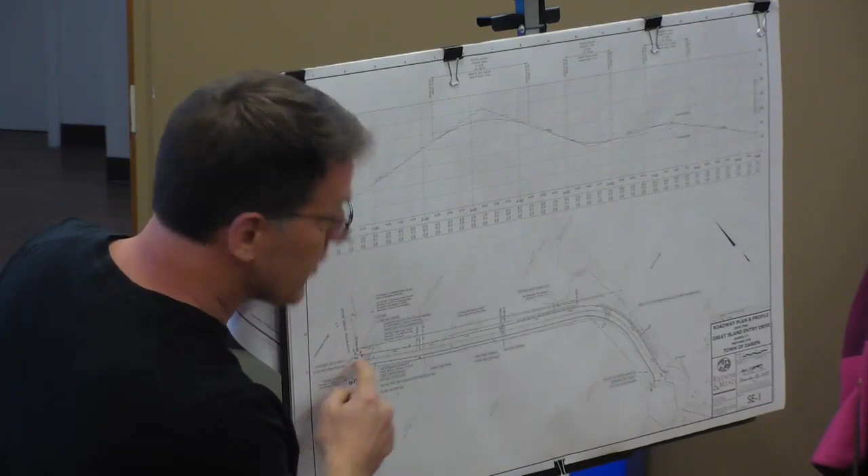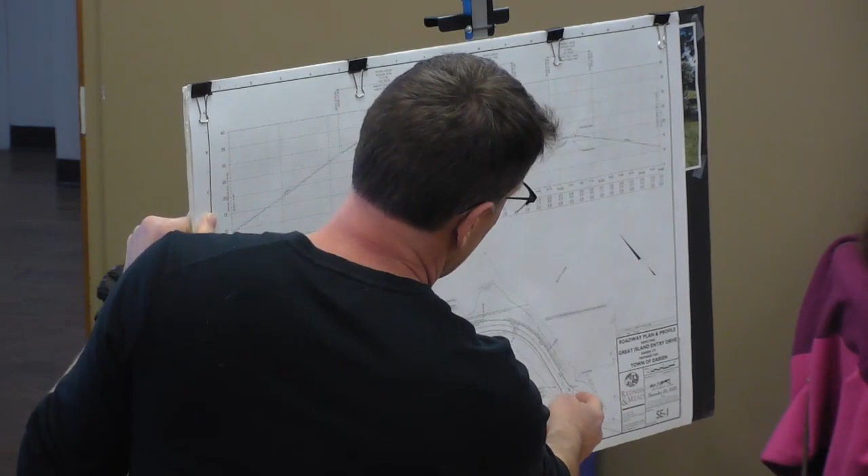You hear Great Island and you think that whole big, beautiful property that the town bought, which is what Great Island is. But what we are here to talk about specifically tonight is not the island proper, but the driveway to the island. It's a piece of property that starts just across Rings End Bridge, where everybody is familiar seeing the gates from Rings End Bridge. That piece of property goes in about 1,000 feet to what was the cul-de-sac of Great Island Road, which was part of a 1980s subdivision of this parcel of land. But now that piece additionally is owned by the town of Darien. So we are here tonight only talking about this 1.6 acre piece. And the importance of that 1.6 acre piece is that it's really the critical path to open up public access to the island.

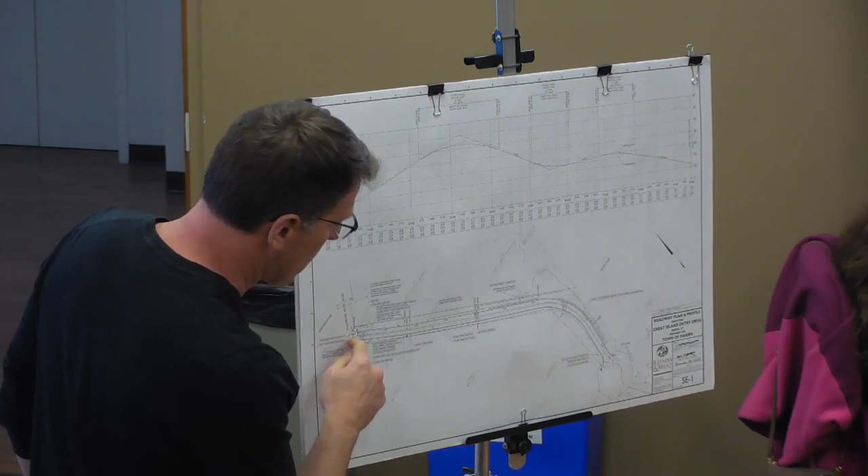Right now in this narrow strip of land is a 12-foot wide driveway. Obviously a 12-foot wide driveway is not wide enough or comfortable for public access. We also have to think about pedestrians and strollers and bikes, because ultimately we have a wonderful open space at the end of this road to use once we can get there. So in order to make this suitable for public access, which is the focus of this first bit of work proposed, we're going to replace the driveway that's there today with a new, wider driveway. We will be placing a 22-foot wide driveway, as narrow as I would want to make it, but still comfortable for two-way vehicular traffic between approximately Rings End Bridge and here.

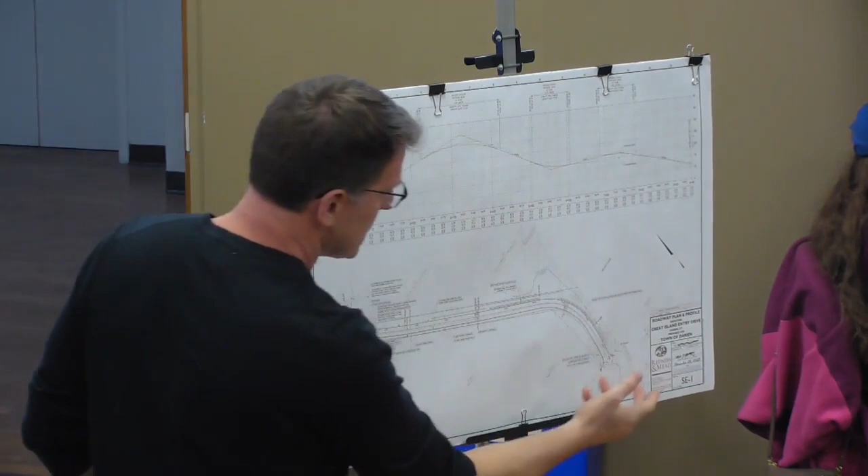These are the two causeways, if you've visited Great Island, that go out to the island proper. So this gets us to basically the entry point, the other entry point to the island. In addition to the 22-foot driveway, we're proposing a 5-foot sidewalk set off the edge of the road by a couple of feet, to be a little more gracious and keep the pedestrians and vehicles a bit separate.

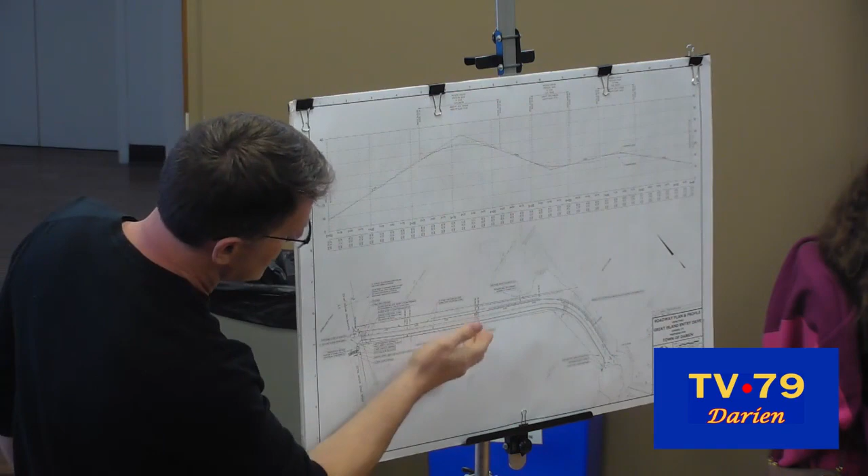Given the position of the existing drive, there are actually portions of that existing 12-foot drive that are on this property to the west, north being that way. So the driveway is not only being widened, but it's actually being moved and widened, so it's an all-new driveway. And because it's being moved and widened, there are some spruce trees on the east side of the access way that are in the way of the road, so they're proposed to be removed.

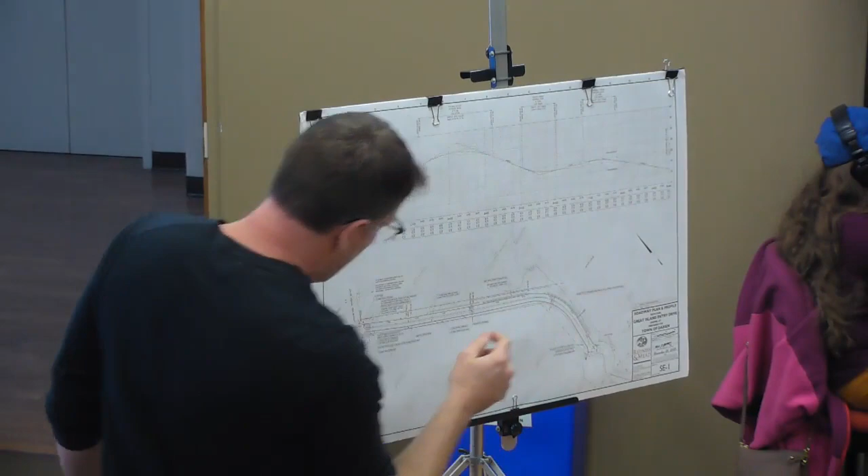At the beginning, at the gate. Your plan is so much prettier.

The existing gate is, of course, too narrow again for that 22-foot driveway and that 5-foot walk, so we are proposing to reconfigure that gate.

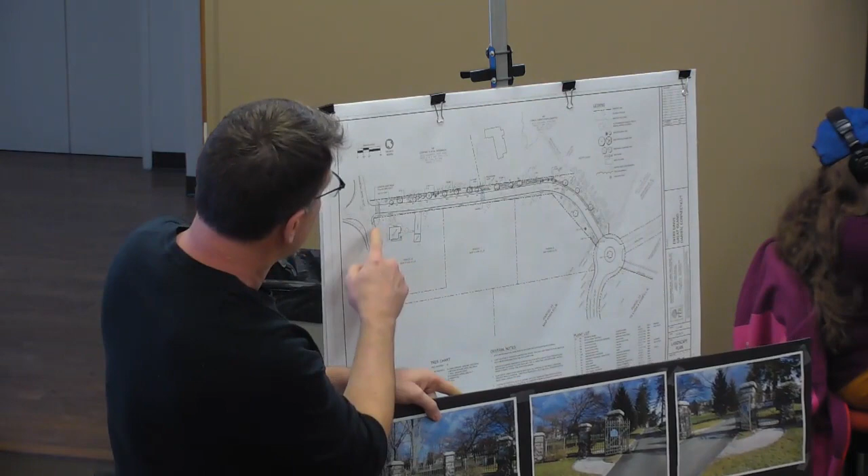The right side will stay just the way it is today, but for maybe one change here. Because you see the property boundary here, this is what the town owns, this is owned privately, so we actually can't really touch anything right of that post. The town owns the post, someone else owns the rest.

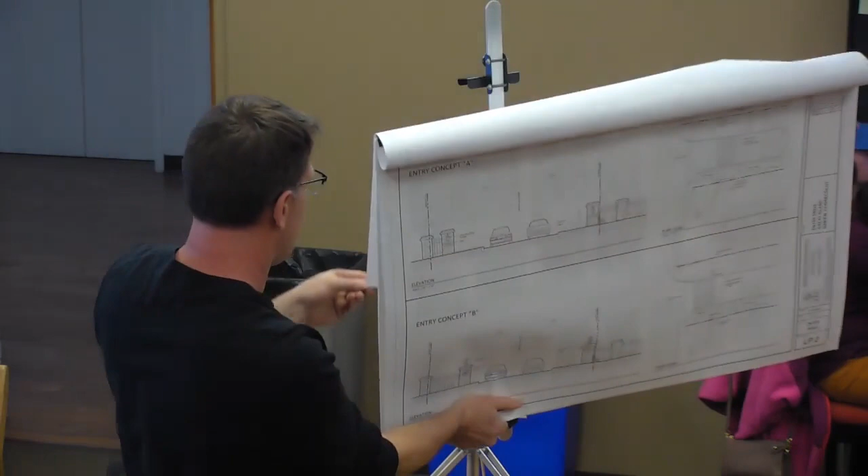So we're proposing to leave that pillar right where it is, but we're going to reconfigure the left side of the driveway. Matt has prepared two options for that, just to study them, although we've kind of come up with a favorite after talking with the design team and the Great Island Advisory Committee. There's option A at the top of this sheet and option B at the bottom, and the differences largely are over here.

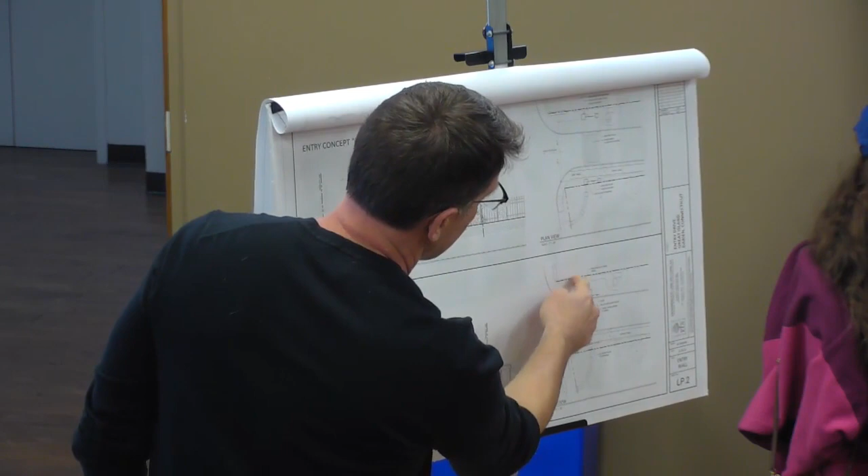Again, that doesn't move, that's the right side pillar. This would be the rebuilt, relocated left side pillar, tight to the curb line but not symmetrical on the road, with an arcing wrought iron fence to connect to another pillar that's staying. This option tries to preserve the gates, though I'm not even sure we can swing them open in that direction because the slope of the land goes up. Even if it preserves the gates, they'd have no purpose because they wouldn't close anything if swung closed.

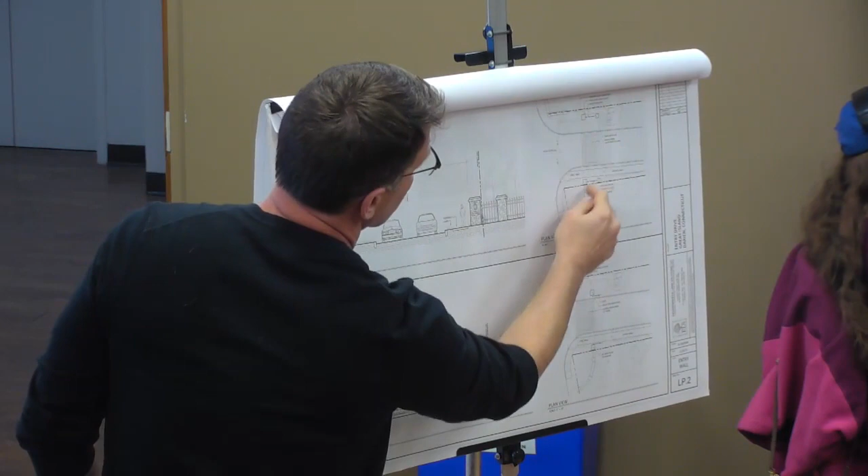So conceptually, we came up with this version. Matt came up with this version where you have the main larger pillar here on the right side, which is not changing, a reconstructed pillar here, and now this is centered on the driveway, so it feels symmetrical as you're driving in. Then the two minor pillars are positioned to the back with a piece of wrought iron fence connecting the two. So those are the two options for the entry, although we like this one, but of course we're open-minded to design comment, which is why we're here.

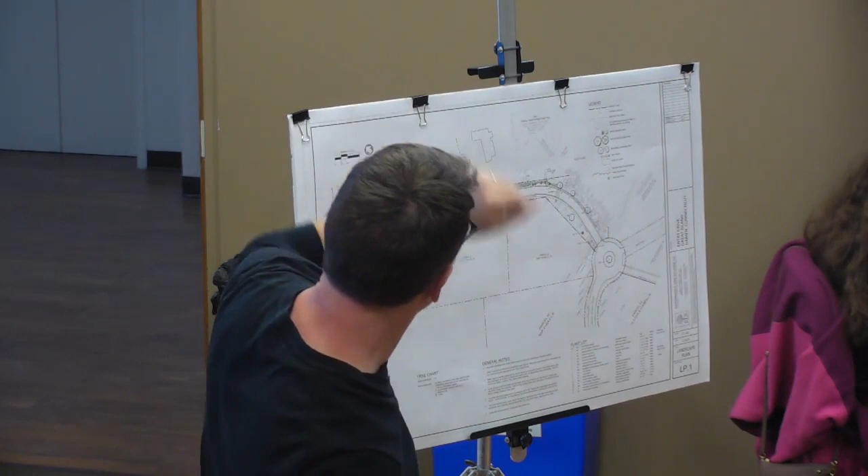Just going back, big picture again. Because we're pushing the driveway to the east, we're getting into some topography where here the land slopes up, here it slopes down, here it slopes down again, and to avoid a big fill slope that could impact properties we don't own, we're proposing retaining walls to make up the grade at the edge of the road.

So these two walls, the face of the wall is actually on the opposite side of the road, so these are fill walls, and this is lower and this is higher. So the main face of the wall is here and here.

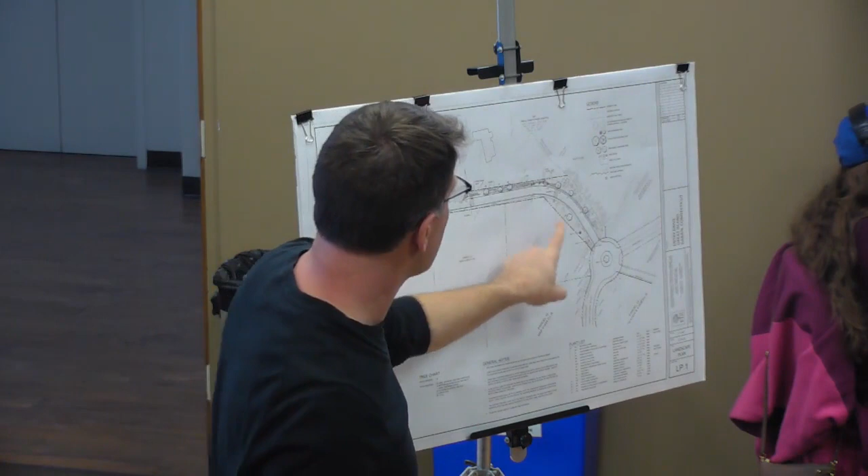And on this side, we are presenting two options, really for budgeting so we can price them both ways. The first, primary option, if the budgeting works out, is we'll just have a 2-foot tall parapet facing the roadside, and that 2-foot tall stone masonry wall parapet will function as the guide rail needed to protect vehicles from the lower elevation.

The second option that we're pricing is the wall would end at grade and be flush with grade, so you wouldn't even see it from the drive side, and instead there would be a wooden guide rail in front of the wall to protect the vehicles there.

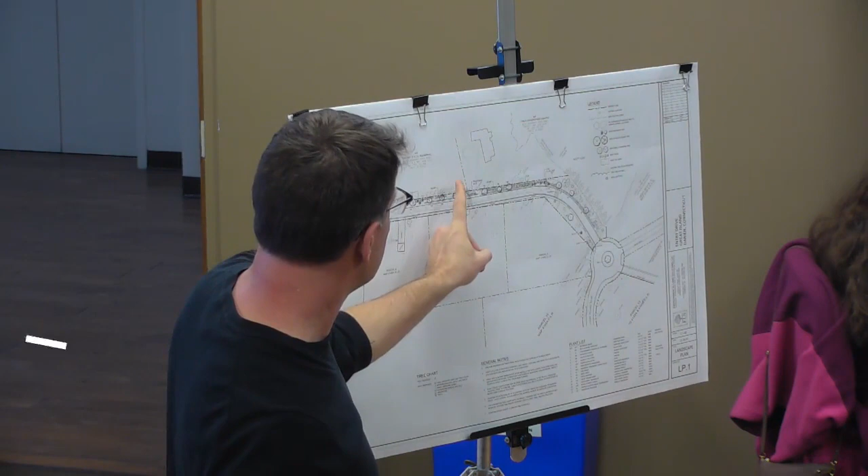Here, this is a cut wall, so it's low on this side, high on this side, so you will see the face of the wall here from the driveway. For these visible sections of wall, we're trying to respect what we saw on the island in terms of the design of the wall.

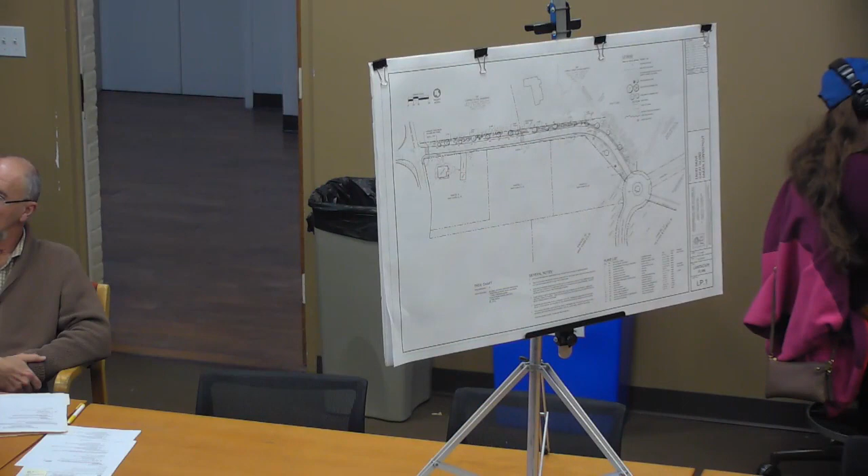So we talked about the entrance, the walls, the walkway. One thing that comes up is the existing 12-foot wide driveway, which you can see here, here, and here, has on its edge a gutter, with blocks on either side and a cobble-ish gutter in between. We're not proposing to recreate that detail on the new drive.

It's simply not anything we'd recommend for what is now going to be public access, in terms of tripping hazard, walking, bike and stroller friendliness, or maintenance. But what we are doing is reusing the curbs—we'll salvage the block curbs, and those will become the curbs of the new driveway. The cobbles will also be salvaged and stored on the island, with the hope that there's some use for them in the future as master planning on the island occurs.

This is kind of the end right now—this is that Great Island Road cul-de-sac, that's the middle of it. Again, not really the focus of the application, it's just presented as what's there. But we imagine that may be included in future planning for the island.

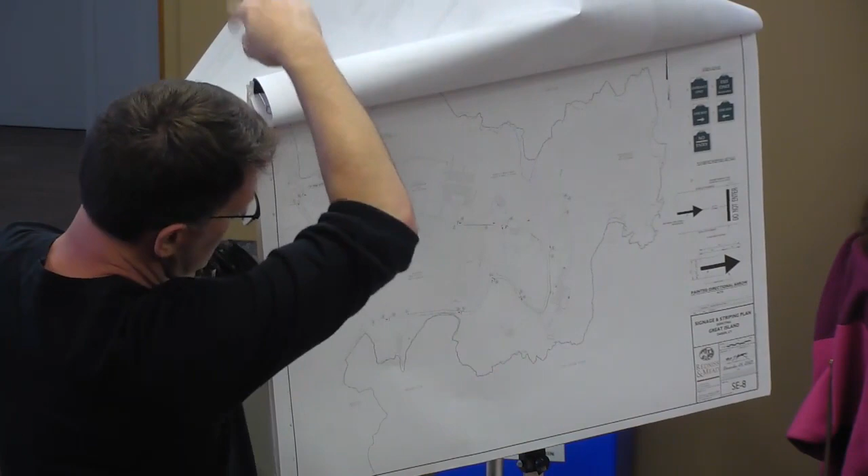this is the roadway network on the island. These roads also are not 22 feet wide, so they're not suitable for two-way traffic. So in the near term, the proposal is to create a one-way loop on the island, with some wayfinding signage added to allow for that loop. Again, while the bigger picture planning process is occurring, we can get public access in a safe manner. The only MUTCD traffic signs would be the stop sign here and the stop sign at the end of the new driveway. Otherwise, we're talking about using a custom sign that recognizes the parkland context for the wayfinding.

So I'll have Matt talk through it. Craig, just to clarify—you'd call this phase one of the Great Island project? Almost phase zero, right—like the thing that's necessary before we do anything else. And just to make sure the scope is clear, this is just talking about getting the driveway in, right? That's right, we're not getting into any other details, you're not proposing or entertaining anything else right now, it's just the driveway. That's right.

Can I ask two questions about the driveway before we go on? Yeah. I know you said the gate wouldn't be able to be used, but in the future for privacy and security, is there going to be a gate for nighttime traffic? And it seems to me that getting to that road, if you're doing all that work, there needs to be some thought about lighting—have you thought about it? Yeah. And the other thing I didn't hear anything about was a bike path. To me a walkway and a bike path are two separate entities, that's huge. Matt's going to talk about lighting and landscaping.

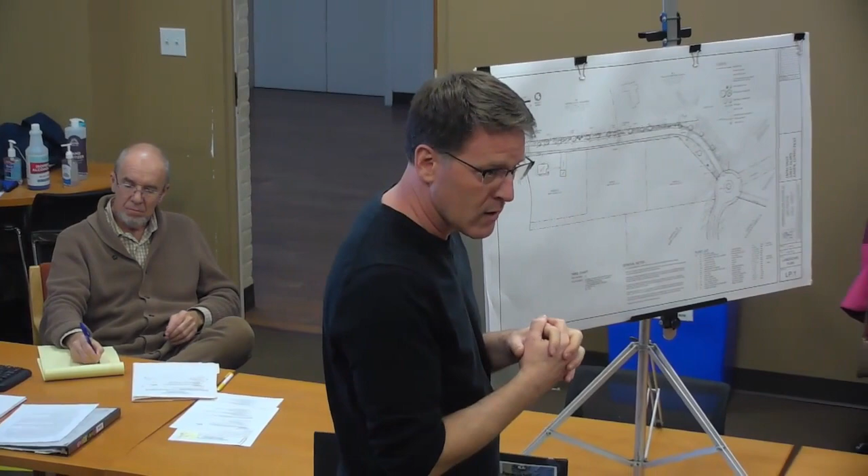Yeah, I appreciate that. Given the narrowness of this particular strip of land, we'd assume biking is very similar to what it is coming here, which is you're going to be on the road. The hope is that something more grand is developed on the island if you wanted something segregated. But I guess my question is, does it have to be that way?

Because to me, the entrance is actually the key portion of this, because that's where the most vehicle traffic will be, especially in the near future if that's the two-way section of this whole project. We don't know if it'll be the only two-way section eventually, but for the time being, whether it's 1 year or 5 years, there's gonna be a lot more interest in this piece of property right now versus later. So to not have a dedicated bike path if you're actually physically building this, I totally understand the comment, can't refute it.

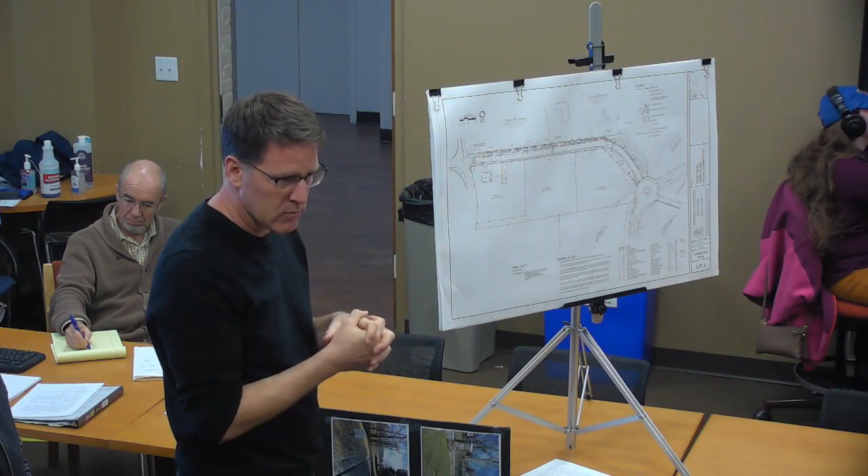We just have to ask, is there room? Is there limited space? This is the property boundary here. The sidewalk is basically immediately adjacent to that. This is the roadway here. And then we have to respect the neighbors in terms of screening. We've met with all three neighbors to talk through the plans and design them in a way that's sensitive to everybody.

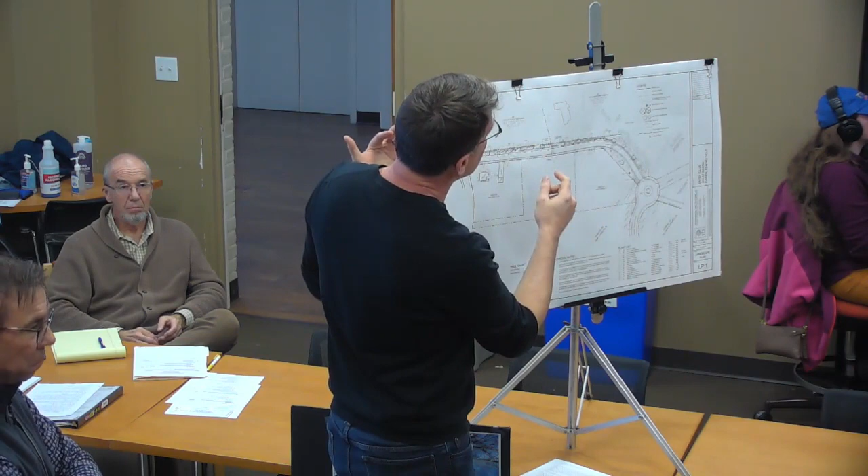I guess you could take the remaining land between this curb and the walls and make that a stable surface, but it increases the amount of impervious surface, and we haven't accounted for that.

Is there an opportunity to maybe consider designating on the roadway a bike route? Like I've seen in Hoboken and the city there, where there's signage for the edges of roads that cue the driver to say you're sharing this space. That way people sort of slow down when they're driving.

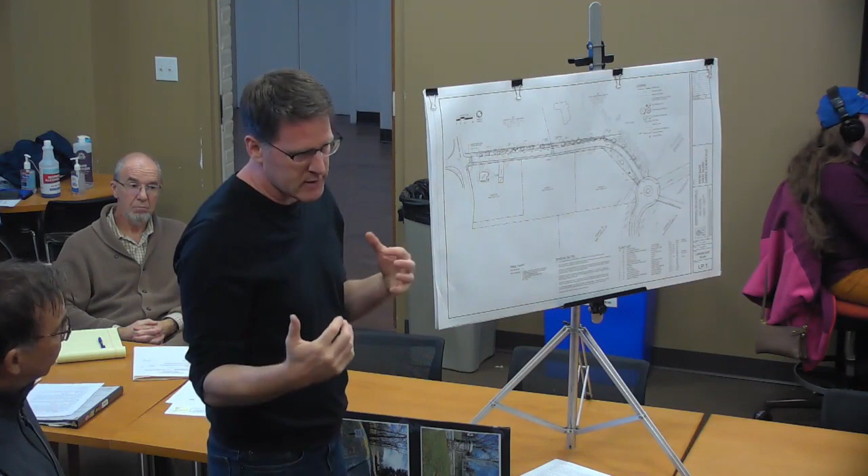He can talk to that a little bit. There's a couple of design features we used for traffic calming. Oh, okay, great, so maybe that's a good segue. But in terms of the gate, in the future these three properties are permitted access to this driveway, so we can't put a gate here. So any kind of restriction would be put here.

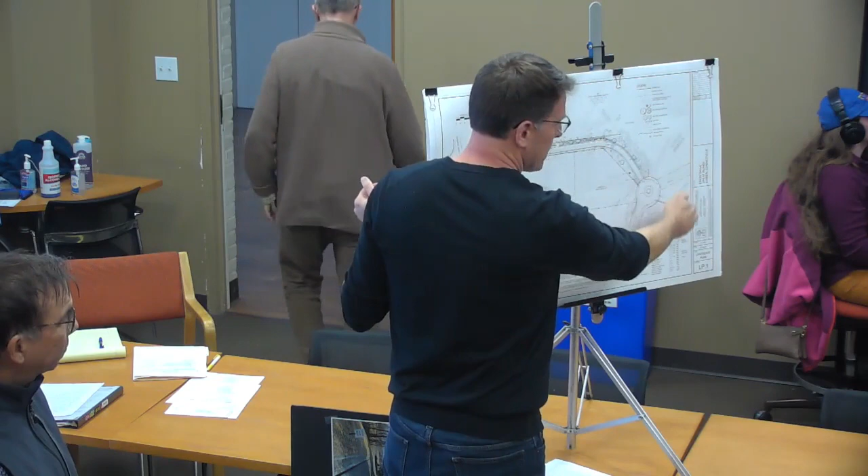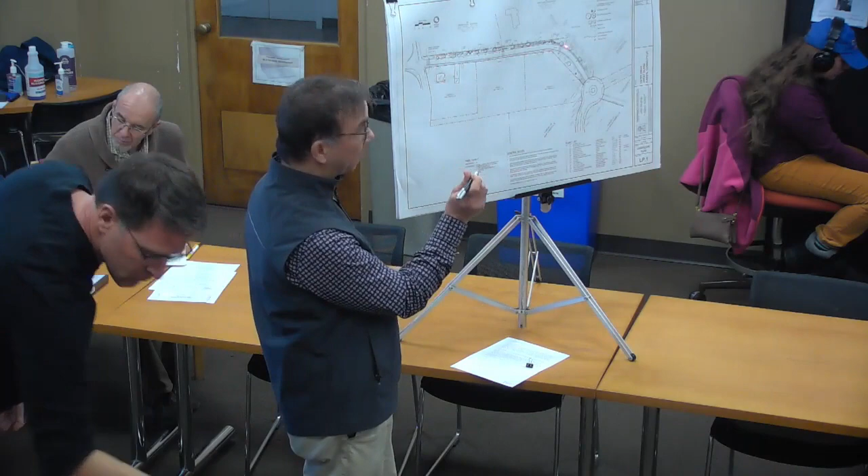Good evening, maybe I'll start with the bike path. I wouldn't want to make the 22-foot road 5 feet wider to get 27 feet. To me, cars would be speeding up and down this road pretty quick, and that takes away from the park-like setting. Maybe I just wanted to start with that one photo.

Just to emphasize what Craig already said, on this one the property line is right at the back of this main pillar. From here over, this is all off the site, so this walkway is off the site, and this pillar actually stays. The sidewalk ends up coming on this side and comes along there and around. Sidewalk is concrete until the pillar, and then it's asphalt beyond that. So the road gets shifted, pushed over to the left, about 7 feet or so from the pillar. So on the landscape plan we tried to match that 7-foot distance.

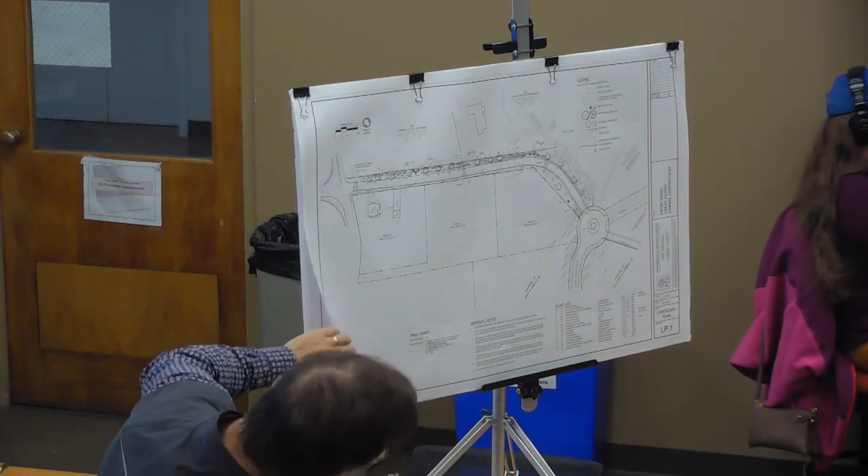Here's the main pillar, here's the property line right through here, sidewalk here, so there's about a 7 or 8 foot distance. Then we had the road, so I wanted this other main pillar to be equally distanced from the center of the road. So it's back about 7 or 8 feet here, and then we have it set back.

The other alternative was just to have this pillar put right up against the road edge, like here, and it's kind of off-centered when you look down. I think when you view down, I prefer this alternative over the bottom alternative. All of the ivy on the walls gets taken off.

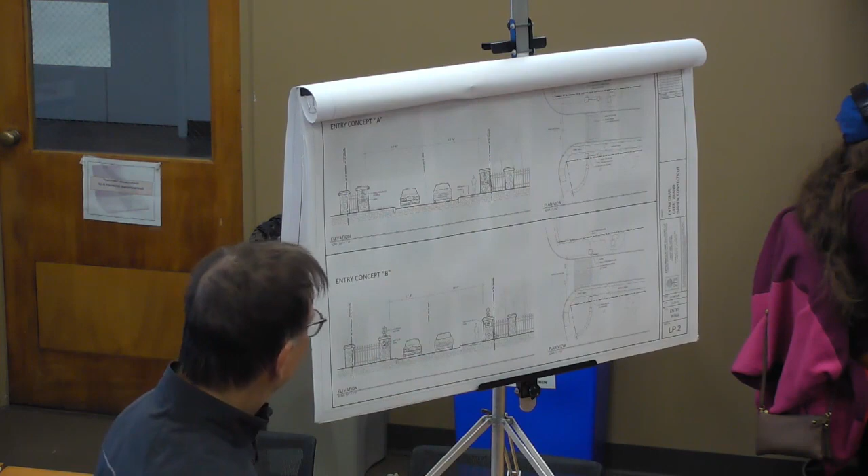So there are 8 pillars on the property right now. Where are the other 4? They're small pillars. There it is - how many pillars? There's 4 on the right and 4 on the left. So some of them straddle the property line.

Well, the reason I'm asking this is it feels wide. So I'll give you a little background - I grew up in suburban Detroit, Michigan. You want a wide road, that's where you go. And I was there recently, and it looks worse every time I go back.

Whenever I see something that doesn't have a New England kind of slightly more intimate feel... what makes Great Island feel so special is it almost feels like you shouldn't be going down that road. It feels like you're going back in time, and you see these details that belong to a past era, or something with Calvert Vaux, Downing and Olmsted - the greats of that era, when Great Island was first made great.

So I like concept B because it closes it down a little bit, but I'd also like to disentangle for the whole island - decouple the pedestrian experience from the car experience. I really don't like being right on the road, it always feels a little odd.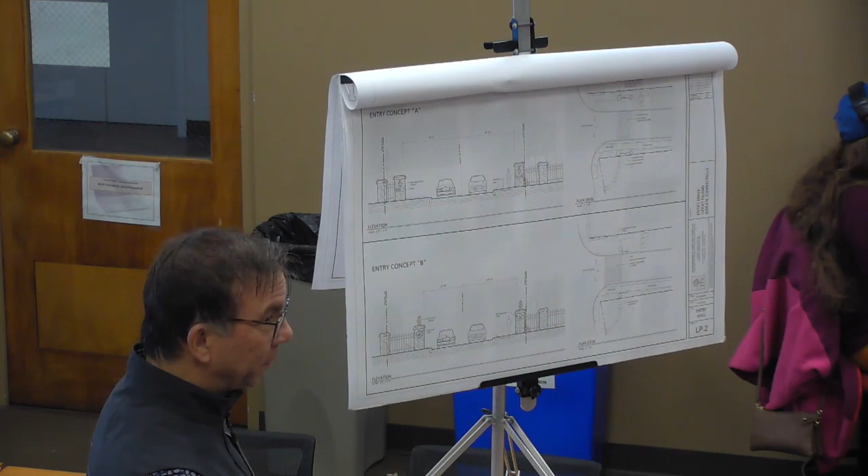We did move the sidewalk. There's an 18-inch to 2-foot landscape strip that's going to run along, just so it's not right up against it.

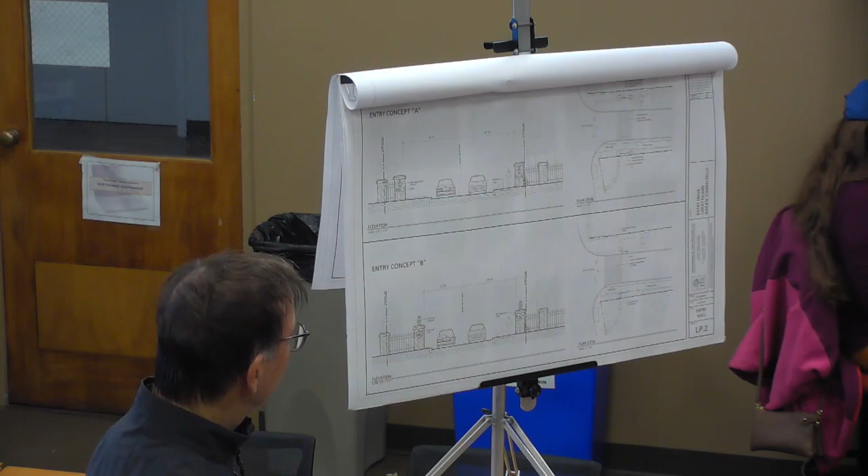Ideally, this column would be right up against the road here, like this one, and that would definitely slow down traffic. But the gate to the right of the existing column - is that going to remain and we just close it, or is that just for the gatehouse access?

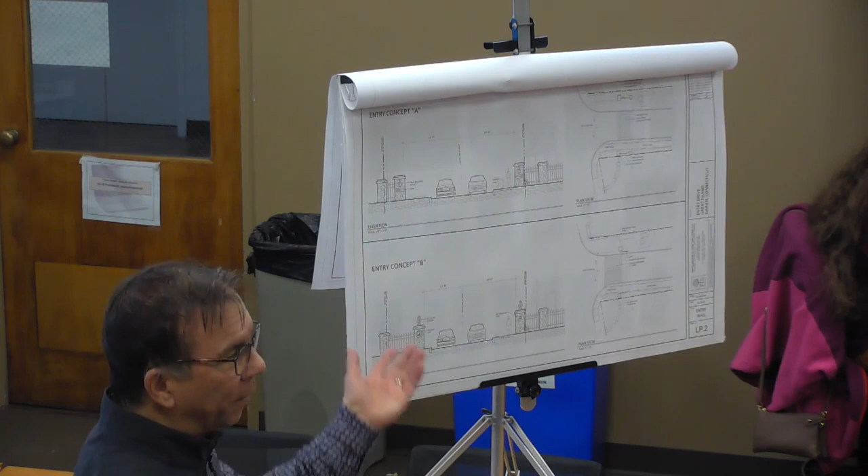So these gates, right here and here - that one on the right, yeah. We just kind of spun them around on this alternative. We recycled the pillars we're removing to put them in the back as secondary pillars, and the gate would go between them, to reuse them since it'd be a shame not to use them somewhere. If they weren't used on the entryway, maybe they get used elsewhere on the island. But we tried to use that.

And then we tried to have some type of paver, I'm not sure what it would be, to let you know that you're entering and give a sense of entry. That would align with the main pillar in the front and the secondary pillar in the back, right here.

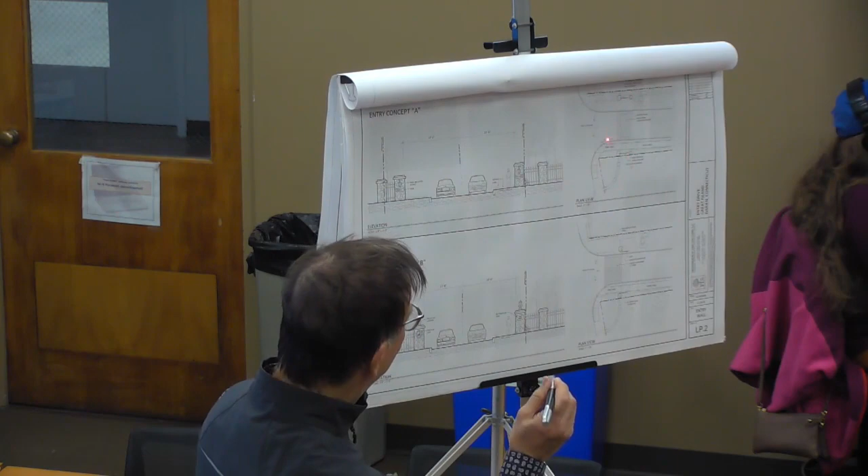I actually have a quick question, not to interrupt - no, go ahead. It's top of mind, I have 3 kids and a very short memory, so not to throw something back... it's something I don't want to take Dan's thunder, because this was his brilliant idea.

The gutters are quite beautiful, I've never seen anything really like that before. I'm assuming all the roads have been widened over time, and it's an interesting detail. I recognize there's complications with having it. Have you looked into maybe keeping one of the gutters as the center lane of the road, and keeping the left gutter in the center to separate both portions of traffic, one going one way, one the other, but having that detail in the center - not to give you more engineering work?

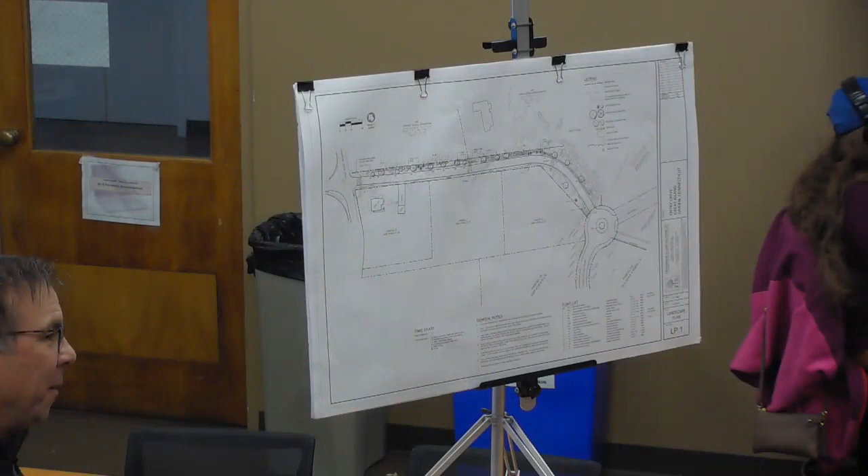We did not. The one thing I'm concerned about with the gutter, if you put them in, is that in 20 years you have to repave or something and it's gone - it gets paved over for whatever reason.

The gutter would go where they're at—we just have to widen the road. So instead of what might otherwise be a double yellow line, keep a flush row of cobbles to demarcate it.

So if we have that pillar and put the small pillar in, do we have to shift over? I think we could move the walk down a bit at that location. I think we'd have room for the small pillar between the walk and the curb.

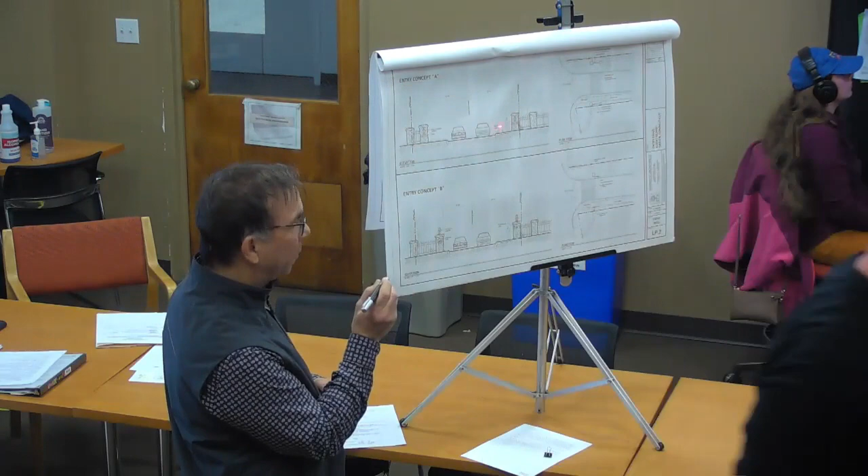So we're just talking about keeping the main pillar here, keeping the walk here, maybe putting the secondary pillar—might have to get shifted like a foot or two over. That's exactly what we were about to communicate.

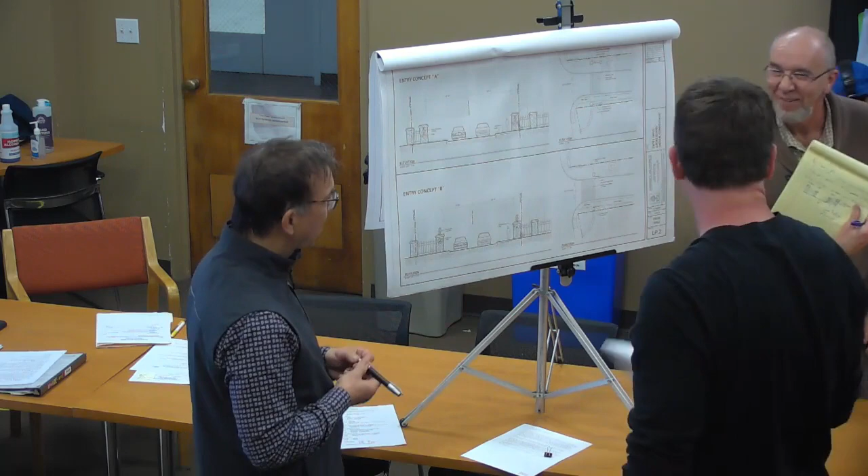That's so funny, that's really nice. See, I told you he's very creative and artistic in his nature. Oh, you got it too? Your minds think alike.

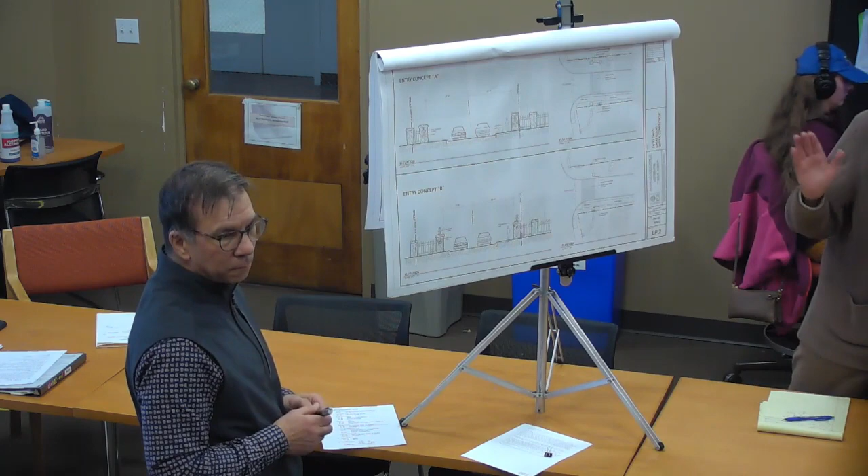That would restore symmetry happening in 3 spots independently—that would bring the symmetry and intimacy to the entrance, where you see the pattern right between the columns. And if you had a gate between the big pillar and the smaller pillar using cobblestones, you could close that gate at sunset, or close it for pedestrians, using some kind of different material.

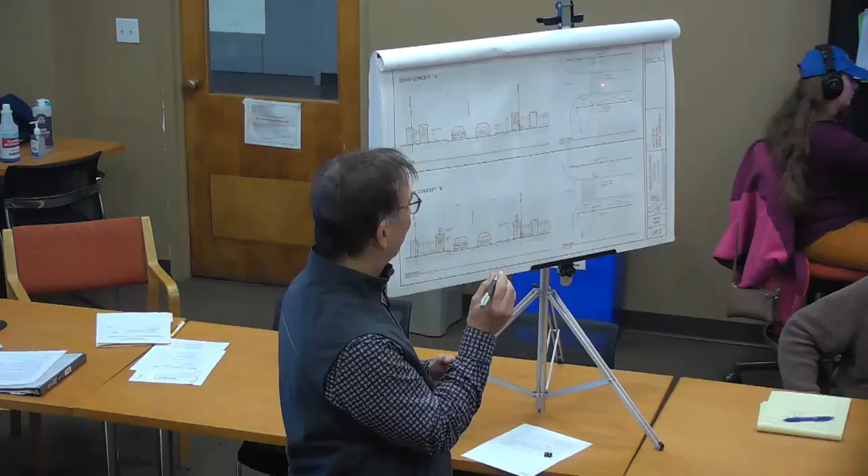No, between the lines, between where the 2 columns are, kind of framing that piece of road to also have that cobblestone, just like a nice detail to an entryway. Plus it would make noise as you cross it—it's a traffic calming element, both visual and textural.

I noticed you had another one further up, is that correct? So yeah, it also would slow traffic again—if you had 2 of those, I thought maybe halfway down the straightaway there's another kind of paver area.

Near the high point, then have to turn—there's another area that coincides with where there's gonna be a light fixture. Correct, and yes, so there's 4 light fixtures.

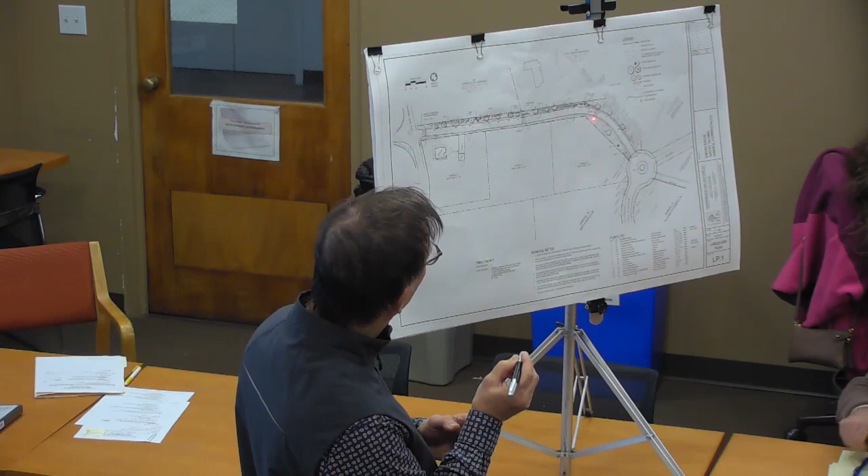Kind of open to ideas of light fixtures—one's up here in the front, second one here, third one here, and then the 4th one over here. We thought the pillars would probably just be uplit from below. There's all different types of light fixtures on the site.

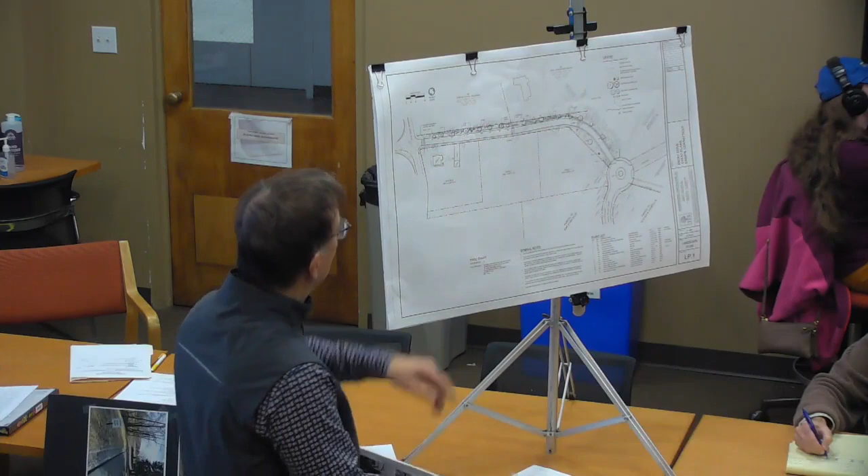Not much design inspiration on the site for lights. These are the pictures—they're all kind of residential scale, small lights. I've never seen anything more unique than some of them.

There's 4 light fixtures here and we need 4, so maybe we'll just use these 4. So there's one when you drive in—first one, second one, third pole, and then on the pillars there's some big ones.

Yeah, that's what it is. This one's really cool, you can play with the scale. I like the design.

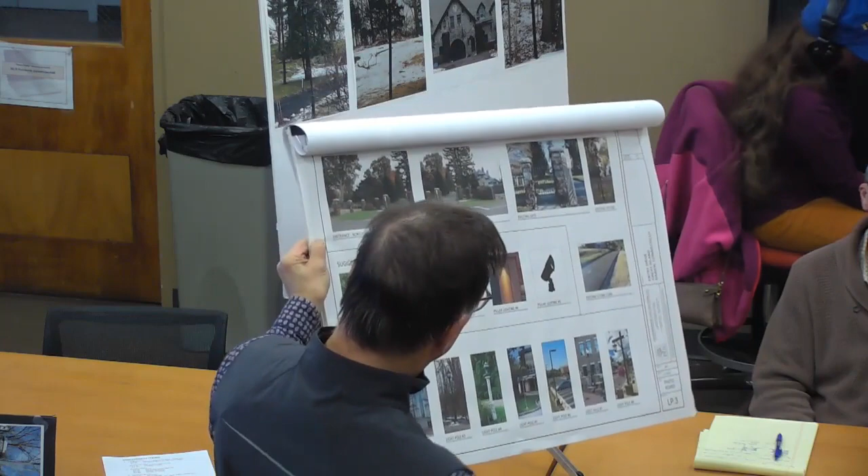On the plan we submitted, we just had a bunch of examples of light fixture possibilities. This one here is used throughout the center of town. This gives a residential scale. Again, it's important to have dark sky, downward pointing, warm temperature lighting.

So maybe just looking for some feedback on what kind of light fixture you think you may want, because this is going to probably dictate the rest of the up-lighting that ends up getting used.

So it looks like that one and the one on the- yeah, that one, nope, on the, yep, yeah, let's do it.

Massive, some massive. I don't know if they'll be dark sky compliant with that. That's the other thing, but it's okay, the banks in town aren't either.

I wouldn't want, like this one here, if you had lights in them, probably like in your eyes, I think. You'd change that with the actual lighting that goes in them now?

This one right here, probably, I don't know if you could find something similar, but the lighting would probably be up on top and then down to give kind of a glow.

I would play with the scale, if the one on the left is pretty small, but we can play with the scale, we can make it bigger. It's an interesting design and it's very unique.

It's not in your face, but it ties to the sort of attitude of the place. So this being kind of the start of the inspiration, the thought.

We want to be respectful of our residential neighbors in this particular location. So sometimes even when you house the filament and the light source up in the cavity, you get a bright glow in the glass, which I think you're trying to avoid in this case.

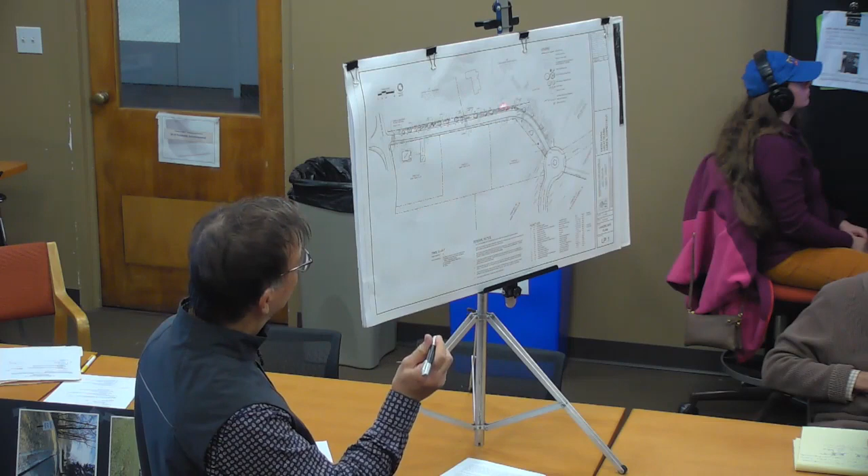And we're proposing like 10 shade trees, 6 medium-sized ones, some small growing ones. We're replanting some evergreens, we've got spruce and holly, and some arborvitae. One thing the neighbor was concerned about is cars leaving at night and this light hitting the house here, so we kind of want some thick evergreen screening there.

She says the police do go down here once in a while, so around 2 in the morning or so, the police are leaving and the lights hit the house.

Still got to go to EPC. Isn't the house up on a hill? How would the lights hit that house? It shines straight this way to this house.

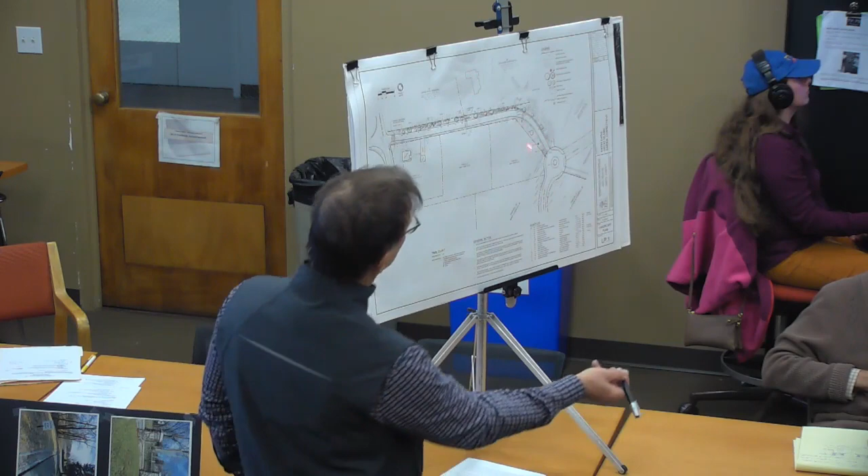So when you're there, it's... could she plant some plants? We're trying to be a good neighbor.

I think that's, we are taking down the 16 trees that are right in her view. But she also said too, like, she does like the view out and across. Exactly, I like my view too.

Now I have 12 new arborvitaes, because you know what, parking lights are fun.

So I went through the plantings, they're all fine and great, they're all screening for the most part, other than that kind of marshy area where you have a few river birches and stuff.

Did you consider doing any kind of alleys or adding to the grandioseness of things, or are you thinking subtle, less is more? That area isn't developed, wasn't sure what was gonna happen on this side, so trying to keep it informal with that.

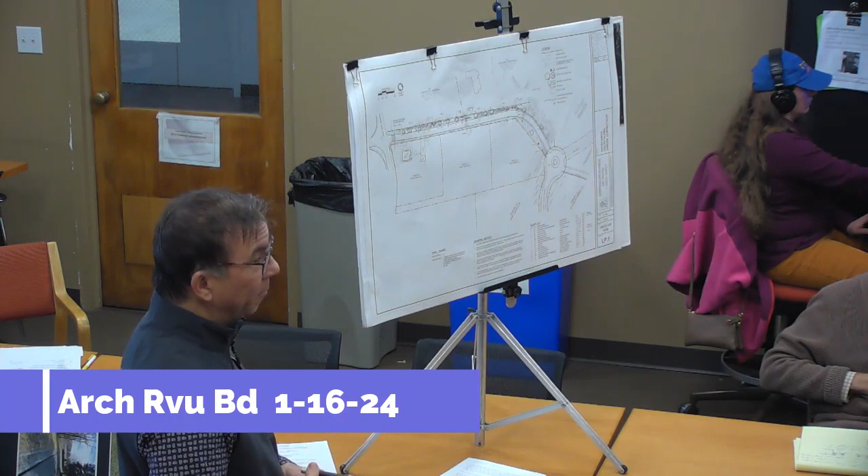We did get a comment from a biker that said that if you're gonna plant oaks, plant them far back, because they don't want the acorns on the road. So I do use a lot of oaks.

I just wonder, because it's an interesting swell when you're coming in, which I didn't appreciate until I saw the grades on the chart, but I was wondering if those future properties will be developed and there's gonna be houses.

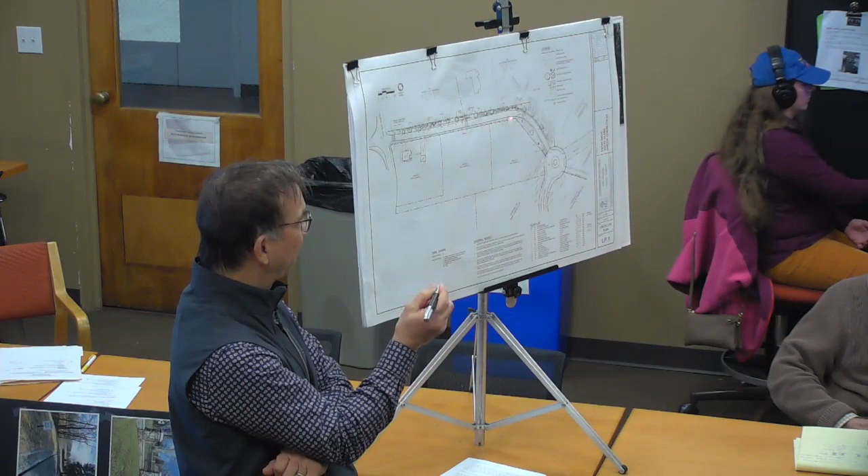So I did see a planting plan 2 weeks ago or so, and it did have just kind of a row of oaks on this side. Well, oaks are... a London plane tree.

Yeah, I know they're not super popular right now, but they definitely would have been in 1900. And having that kind of craggly old look, and they don't really lift asphalt as much as other trees do.

Yeah, the sycamores. So London plane is a little bit better. But again, we're just here for comments, and they definitely take those. Yeah, no, I think for screening it's good.

I like your idea too of finding plantings to consider what they would have been at the time. So you really do feel like, because I think the goal here is to feel like you're almost going back in time, going to when this was first erected.

So to consider that versus bringing the plants we would normally choose for a new commercial space. On the planter, I think it's a nice idea to differentiate everything else that's going on. We do have a couple of utility boxes here that we'll screen out.

It also is the house here, we think they have a view across the site to Long Island Sound, to the water. So trying to keep a balance of not trying to block their view totally.

Monica, maybe you can speak to this more, but when are they thinking about doing this work and when would it possibly be open? We're thinking about the construction on the road. I'll speak for Ed. Starting in April and concluding in the beginning of July.

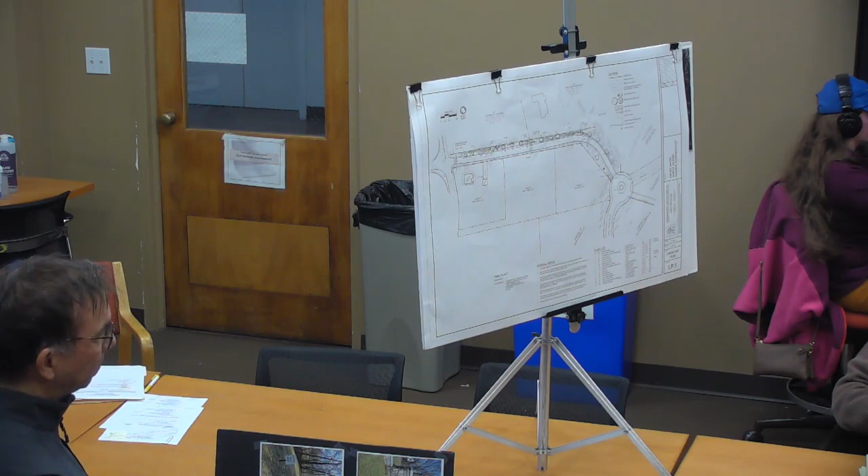All right, I have a whole bunch of questions. I love the idea of the gate and shifting it, but I think you brought up a really great point about this opportunity for an alley, and really planning it so that when other people come in on these parcels, we've already defined the entry point and created something that's going to last regardless of what they do. So I'm wondering why we're putting...

Are these parcels accessed from that road? Yes. All right, so I think we need to look forward and plan something that they're going to have to deal with once they buy the parcels, and we've defined it so it stays that way. Because right now we've given them a sidewalk, and they'll do all this over here and over there, and it won't be controlled by the time those things are sold.

The way I look at it is, again, I would have loved to have room to create the alley here, but I know there's probably lots of rules preventing that. It's just very narrow with the topography coming down on this side and where this is positioned, because this is Scotts Cove here, and it's narrow to do that on both sides.

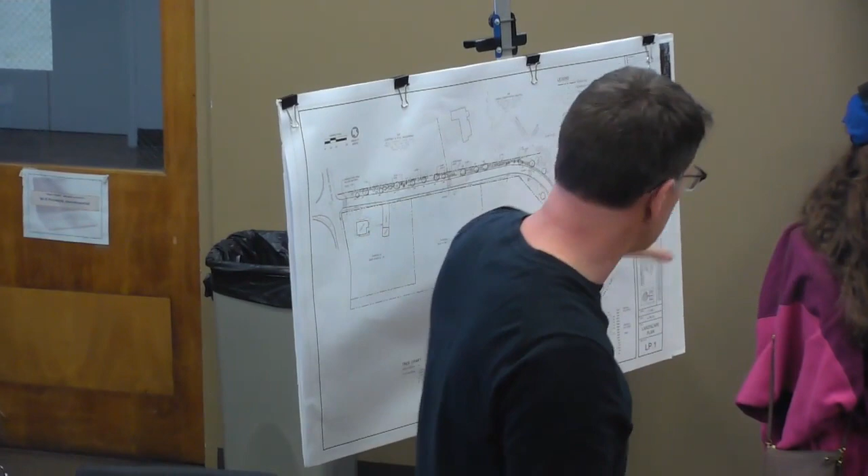There's no way to do something small there. If you've been to the island, you know that this is currently an alley of trees that's not in very good shape. I think they're sugar maples and half of them are in significant decline. Because we have these access points and these neighbors, if I was thinking about a master plan for the island, I'd start focusing on this to be like a real second entrance, and this causeway to be the alley, because there's room to do it there.

I'm kind of on board with not downplaying it as well, as opposed to just having it blend in. I don't want to dismiss it and say you're just getting from point A to point B, but I think this should still be a wow point when you get here. Having the elements that are historic pulled in subtly is, to me, the right move to get to that distribution point.

Not the cul-de-sac or this road. Why couldn't there be an alley once you take out the curb? I don't know, it doesn't have to be an alley, it could be something a little more special. That might be the solution we're going to like, once those people buy those three parcels and throw up their own idea of good architecture and landscape.

Those will be like entrances into their property, so I can already kind of foresee what that might look like. It's hard to avoid the fact that we are essentially designing a road for them. That's fine, I just wanted to understand the whole situation.

There's additional spruce trees here, mature trees that exist. But if we're taking the tact that we're doing this for the next 100 years, would we take the opportunity to replace those and start setting that up here? Is that kind of the idea?

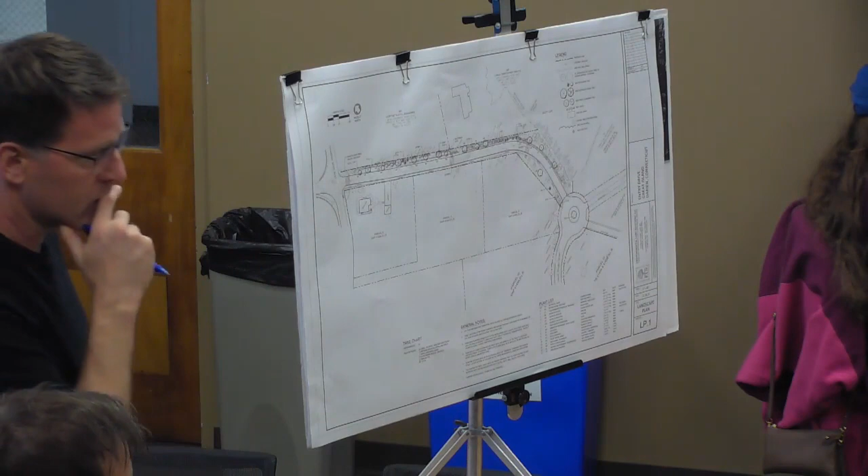Yeah, but how does that retaining wall factor into that? It's a steep slope, Scott's Cove is right there, we don't have a lot of room. What's the drop? If it was the 2-foot stone, that's something we hadn't discussed, whether it's stone capped or wood on top. Personally I would not be in favor of seeing wood.

We're up at elevation 16 through 19, and Scott's Cove is down at elevation 3, so it's quite a big drop. Is 2 foot enough? I guess the pedestrians on the other side. Yes, exactly, we weren't doing it for pedestrian fall protection, we were doing it for vehicular.

A quick question on the trees to be removed - are they going to be repurposed in any way, or has there been any thought? They're pretty big, probably 60 feet tall or maybe larger.

The new guy - oh, there's a guy. I'm not saying replanted, I'm saying find someone willing to take the wood, take the timbers. Mill them and have them possibly be incorporated into some of the new structures. That's what she said. So this new guy you just said, who's the new guy down the street? Andre, what was his name?

He took over the Seymour's Democratic headquarters at election time, there on William - just a random thing, that big sign right there by the Shell gas station. He's an old furniture maker and he works with wood. I don't think he's a timber framer per se, but you'd have to get a logger interested in taking them, part of the mill, the whole thing. But that's his deal I guess.

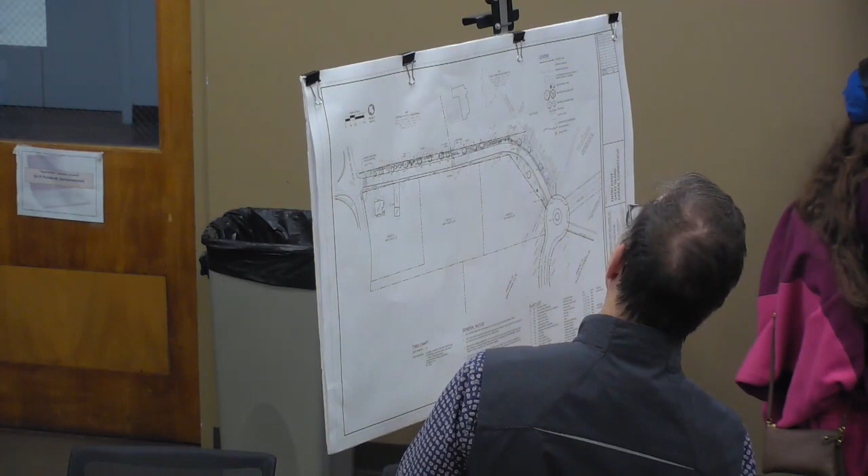What was his last name? There's no way - I mean, there's good ones up here. There's no way that they're in the middle of the road, right? Well, they're in the middle of the road, that's right here, but they're not gonna...

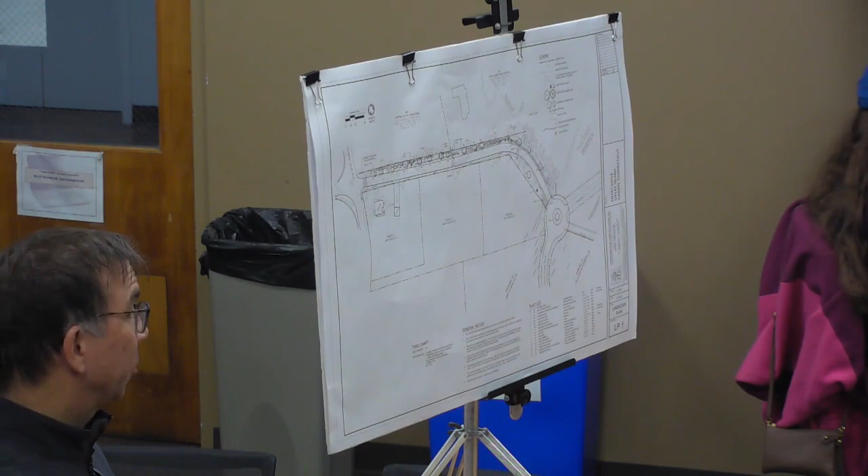I wouldn't want to design around a Norway spruce - you have a large one, you design around it, and then the next year they're gone.

But you said they're 60 feet, what are we protecting by the way? They're probably older than 60. The trees that are being saved and protected - there's a drip line detail on the pages of things being protected. I was just curious, it's a little - we're not gonna, we'll have to, there's two historic trees. There's standards, there's the critical root zone, and then there's the drip line, right?

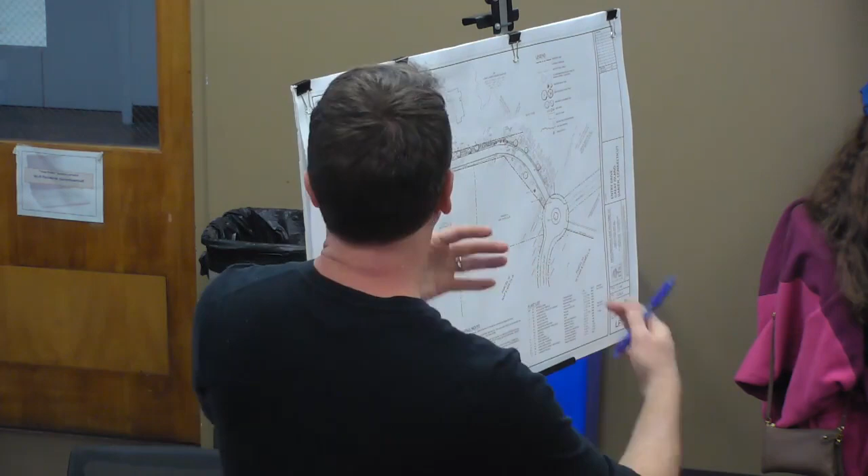So we try to start at the drip line, but if we can't do that, we'll trim back to the critical root zone, that's typically what we do. There's a few spruces on this edge of the road, and this edge is pretty consistent with what's there today, so we don't expect we're intruding on a root ball that hasn't already been impacted.

In general, I'm concerned with the plantings we started with. I still feel like less is more. I know you guys are doing some screening, but I'm worried that in 10 years, even 5 years, these neighbors are gonna realize they don't like that much traffic and they'll put up their own fence and their own arborvitae. Combined with the plantings we're doing, it's gonna look forced and awkward. I feel like it should really be pulled back, put minimum planting along that wall, even less than it is now.

Want to buy 3 more properties?

You're talking about the east side. I think right now on the other side of that line, it's gonna get super overdeveloped and feel unnatural and heavy. If we can keep that as natural as possible, that's fine, but we still need to have a conversation about the retaining wall material there.

Craig, just really quickly, I'm looking at the existing north side, the gutter, or the detailing as I'll call it because it's really quite pretty. Other than a short stretch of maybe 5 to 10 feet off, for the most part it runs across the center pretty close. Is that something you're gonna keep, or is it not gonna stay exactly where it is? There isn't much wiggle room, like 3 or 4 feet, on the road.

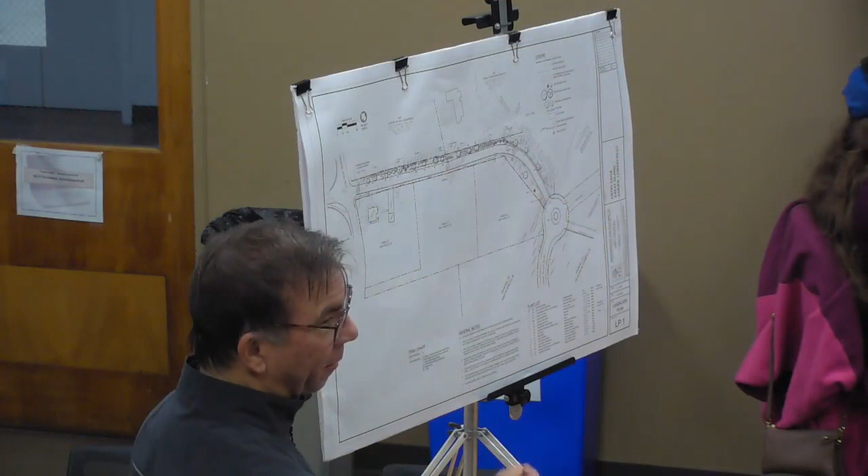I don't disagree. The other thing is, if you come back and say that can't be used as an alley, the other thought is those stones, the decoration you're considering for the gaps within the main drive. The pavers, yeah. Maybe it's used as a segment right through the center, and it's used here too. But the alley is preferred, I think it's the better option. Both would be just gorgeous though.

Save money on your trees. The neighbors will take care of that.

I don't often come here when you guys do too many plantings. I know, that's right. The next time I come in here, you can see why. Usually it's 150 feet on Post Road, whereas this is down Park in a residential area, and we've got great views - 40 feet of frontage or 30 feet of frontage, and that's it, and everything else is the experience, right? So yeah, you get the views here.

It's a little different. Can we talk about the retaining wall material? Can you pull up your inspirations again for that, and which ones you chose, and then talk about the cap? This one's perfect. So this shows, I think, the block style that we'd likely be able to source today - this orthogonally cut New England stone. In most locations it's got an obvious mortar joint. These actually have it kind of extruded and beaded a little bit, so that's kind of where we were headed. The only difference would be, like this wall here, it would be the wall without the cap, just something simple. Is this a mortar wall, is it wet lay? No, there's no concrete core, it's just stone and mortar. Okay, those are the two ingredients. Okay, it's nice.

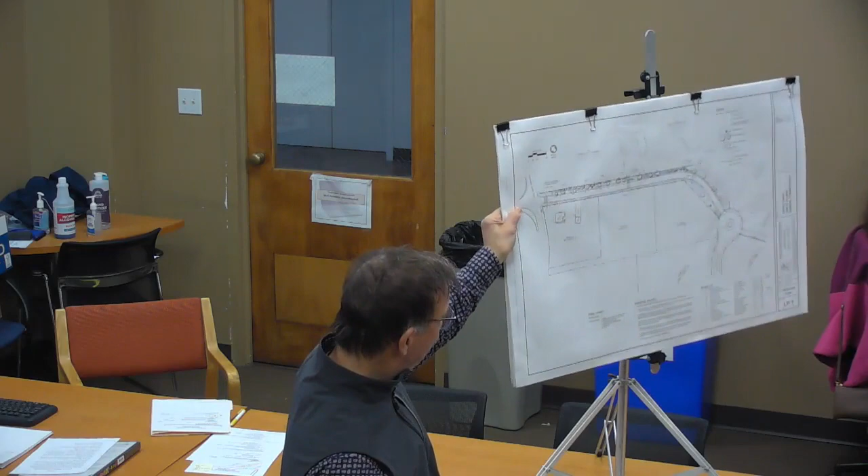We have one at each end, one at the high point, and one at the curve. It just seemed like a lot. Over here was by the existing driveway, I thought there'd be important there. One kind of high point, one at the turn, and then one down here, which is about every 50 feet... no wait, it's about every 200 feet.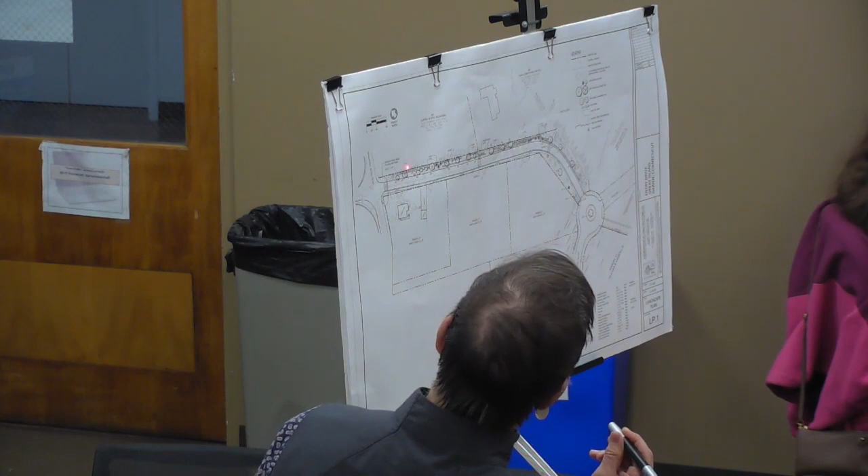Are most of them on one side, or are they alternating sides? There's ones on this side, these two are on this side. Okay, gotcha, that's just what I thought - mainly because there's more room here, and you're fighting with the wall and the plants and the sidewalks. They're probably ideally could put them all on one side.

Yeah, I don't know if you can.

Okay, but I'd rather see... any other comments, questions, or are you guys clear? I can recap right now in the meeting, I'll definitely put notes together for you all in our viewpoint system so it's organized.

We were just talking about the fact that instead of this, could you somehow take the light and integrate it into the wall so you don't see this big thing pointing out? Do you need it to point out? Can you integrate the light into the actual retaining wall?

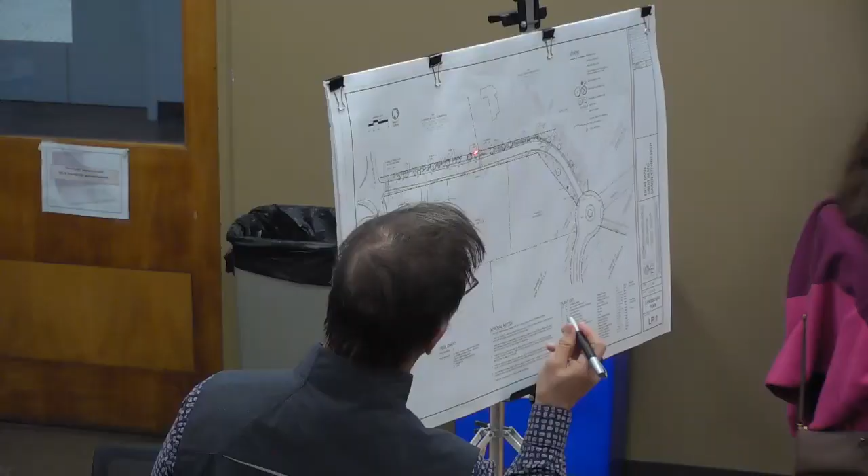The two retaining walls closest to the cul-de-sac, as high as they would be, is 2 feet off the ground, so that's not going to throw enough light there. The one closest to the gates is maybe 4.5 or 5 feet at its tallest point, so it's also set back a bit.

How tall are the gates? Sorry, the piers. How tall are the piers? For those we were thinking about an uplight, not having a fixture at the piers, just highlighting the pier itself, 7 feet.

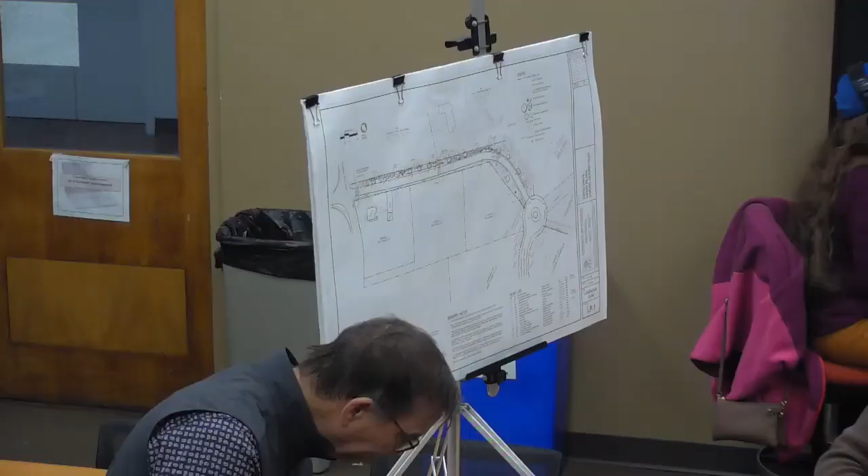My only thought was whether you'd want to create an additional element with a light on top. Ideally what we're trying to do with the light is put a splash on the driveway in 4 locations. That's what we're trying to get, just a little light wash.

So you've got a visual cue of where the road goes. It may be good to wire the pillars, just in case of changes in the future. Yeah, I definitely didn't like the lights on the pillars, that was a little too much.

All right, so I think the strongest recommendation is coming from the cobblestone, right? That seems to be the most passionate cry I hear here. I thought it was the locks... the walks. And the gates? No, but I think we came to a lovely compromise with the entrance, with the pillars, and I think that's gonna come together.

Just in terms of value when you're walking on it, if we were repurposing - bounce a tennis ball on concrete and on asphalt, the concrete would bounce higher, because it's more reflective.